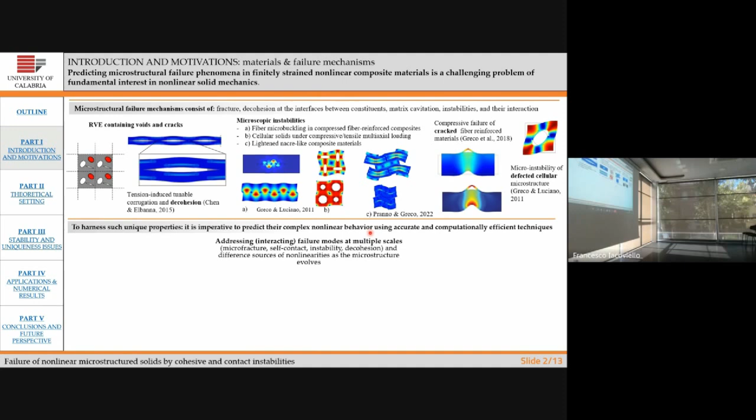Moreover, we know that there are a lot of failure mechanisms such as fracture, decohesion, and instability. So attention must be paid to all of them and to their interaction with each other. As I said, it is fundamental to predict such failure behavior.

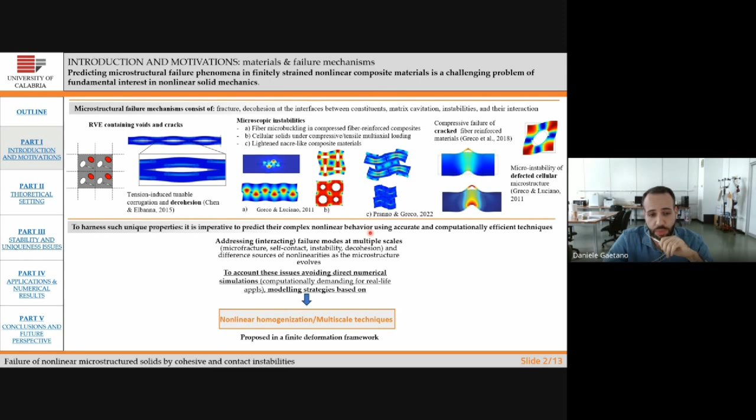In the last decades, in order to address all these failure mechanisms at multiple scales in a computationally efficient way, nonlinear homogenization schemes and multi-scale techniques proposed in a finite deformation framework have been developed. Our work presents an innovative nonlinear homogenization-based theoretical framework for characterizing the failure behavior of periodic reinforced hyperelastic composites induced by reinforcement-matrix decohesion and the interaction between contact mechanisms and microscopic instabilities.

Let's move to the theoretical setting of the microstructural failure problem. We define a representative volume element that occupies a domain, V0, in the undeformed configuration, that contains internal contact and cohesive interfaces. As we can see in the bottom part of this slide, the representative volume element can be made of a single unit cell or an assembly of unit cells in order to capture the microscopic instability phenomenon.

After that, the RVE is driven along a macro-strain loading path by prescribing boundary conditions that depend on the macroscopic deformation gradient, defined by the classical macro-to-micro coupling relations. As we all know, the microscopic deformation field can be split into a linear part and a fluctuation part.

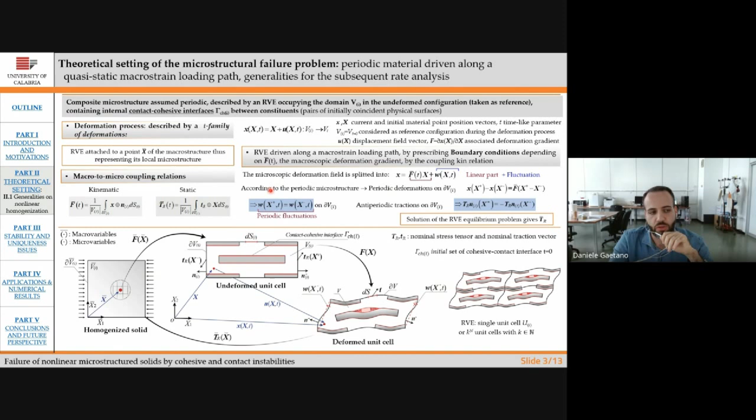So what kind of boundary conditions are we going to impose? We impose boundary conditions of periodic deformation, which implies periodic fluctuation, and we impose antiperiodic tractions on the boundary of the RVE. The solution will give us the macroscopic nominal stress tensor.

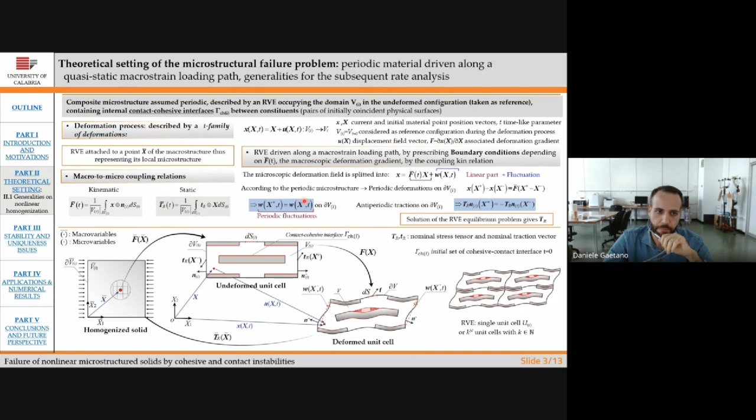As introduced, the representative volume element contains internal contact and cohesive interfaces, so a proper model is needed. Once a cohesive point pair is defined as a pair of material points that are in the same initial position, the displacement jump vector across the cohesive and contact surface can be decomposed into normal and tangential component vectors, with reference to the current unit normal to the lower deformed cohesive surface configuration.

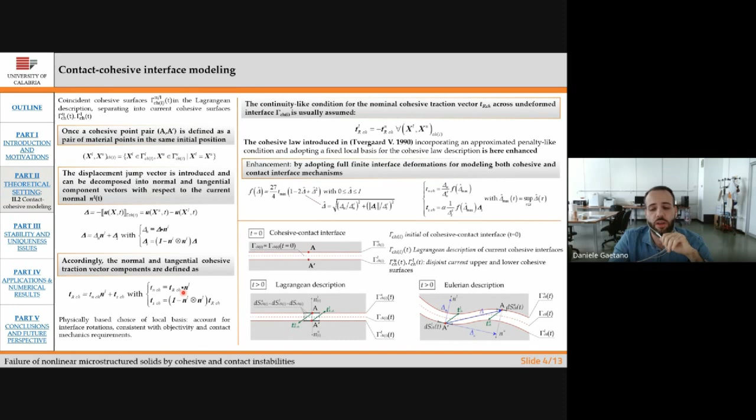The normal and tangential cohesive traction vectors, also referred to the lower surface, are then defined. In this work, we adopted a reversible cohesive traction-separation law first introduced by Tvergaard in 1990, by adopting a full interface formulation for modeling both cohesive and contact interface phenomena.

After the definition of the boundary conditions that we are going to apply on the RVE, and the way we are going to model contact and cohesive interfaces, it's time to go ahead into the RVE equilibrium problem.

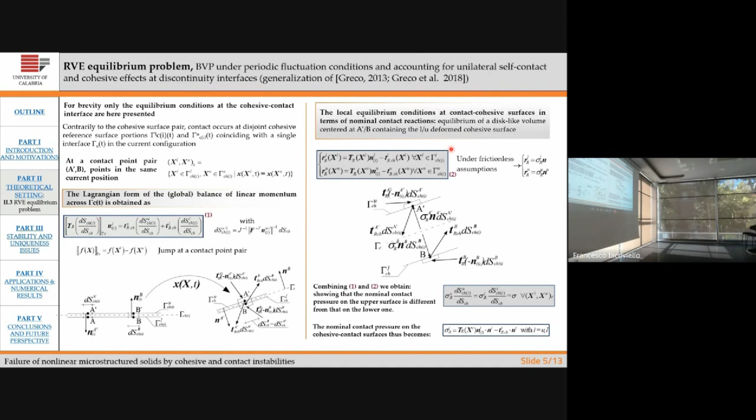At a generic contact pair concerning points at the same current position, we can define two different equilibrium conditions: the global one, represented by equation 1, and the local one, evaluated under the frictionless assumption. The combination of the local and global equilibrium conditions shows that the nominal contact pressure on the upper surface is different from that registered on the lower one.

Moreover, the nominal contact pressure can be obtained, as we can see in this equation, by an algebraic combination of both the normal component of the traction and the normal component of the cohesive traction vectors.

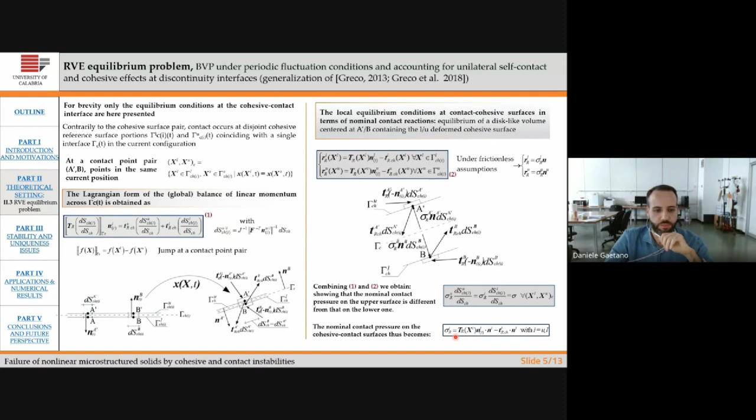Our goal is to study the load-induced instabilities in periodic composite materials that contain internal contact and cohesive interfaces. As I'll show in the next few slides, we're going to solve an incremental problem, so alongside the finite formulation, we need the rate problem.

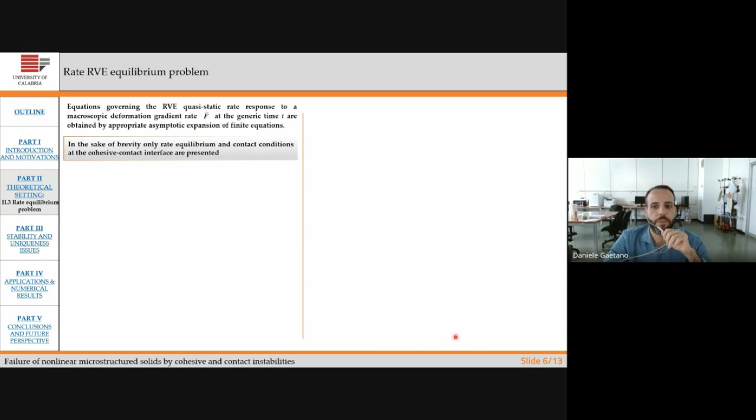At the generic contact pair, we can give the rate contact condition that includes the non-penetration condition. That implies that the nominal contact pressure is only active upon contact, and the additional condition for rating contact means that the nominal contact pressure then vanishes.

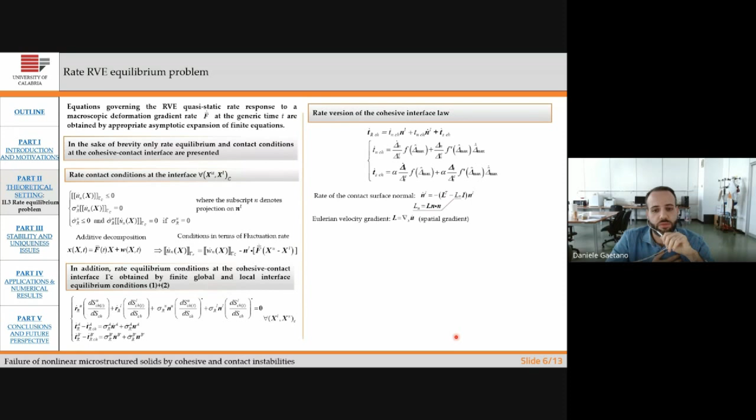At the same time, the rate equilibrium condition of the cohesive contact interface can be obtained by an asymptotic expansion of the global and local equilibrium condition shown in the previous slide. The rate version of the cohesive law is obtained as reported in the slide.

It's important to pay attention to the difference with the infinitesimal theory, because in this case, also when the normal displacement jump and its rate are vanishing, the nominal cohesive rate traction is not necessarily purely tangential, because it has the normal component that must be calculated.

After that, the contact cohesive formulations have been developed. Here we can discuss the stability condition of the equilibrium configuration.

Considering a small perturbation of the current equilibrium configuration for a fixed macro deformation gradient, we can integrate the theorem of power expended identity over the time interval from 0 to the parameter tau, and obtain the work of the perturbation force, highlighted in blue on this slide.

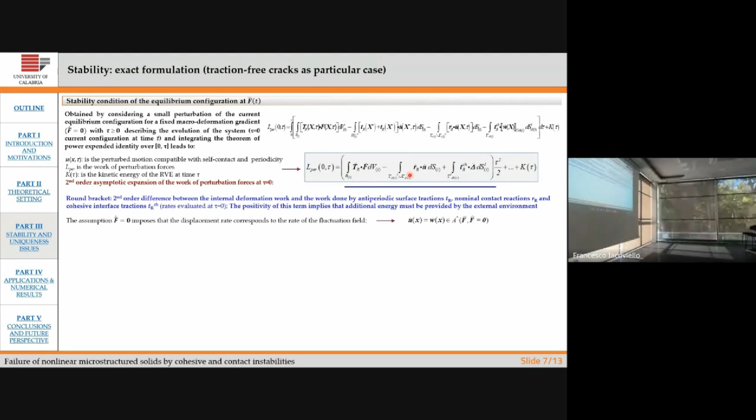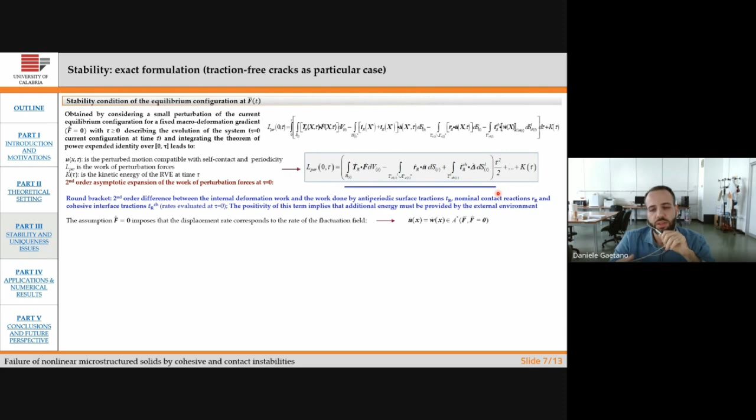We can see that it is the difference between the internal deformation work and the work done by the antiperiodic surface traction, the nominal contact reaction, and the cohesive interface tractions. The positivity of these terms implies that additional energy must be provided by the external environment, and also ensures stability, since the kinetic energy is always positive.

After that, we can define the stability functional over the set of admissible fluctuation rates, and its positivity ensures the stability of the current equilibrium condition. We can see here the stability function and the contact and cohesive contributions.

But the question is, how can we define the primary instability? The primary instability is detected at the critical load parameter, where the minimum eigenvalue associated to the stability function first vanishes.

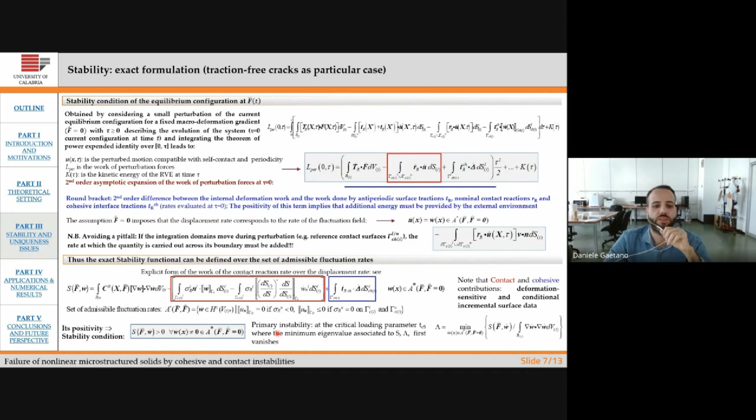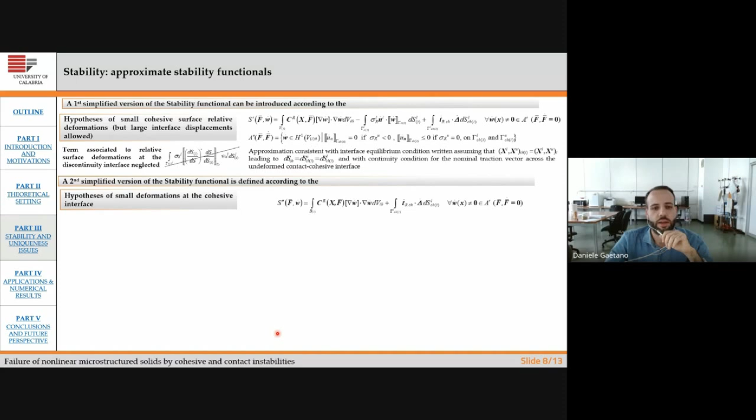After the exact formulation presented in the previous slide, we propose two different simplified versions of the stability function. The first one is obtained by neglecting the term associated to the relative surface deformations, while the second one is obtained by also neglecting the term associated to the surface rotation of the contact cohesive interfaces. These are two simplifications found in the technical literature, for example.

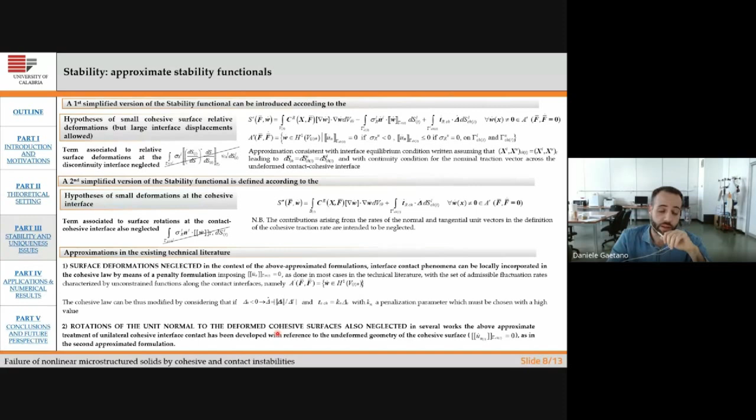Now it's time to go into the numerical results and apply the theoretical dissertation to study the microbuckling phenomena inducing debonding in highly deformable 2D layered composites. The numerical results illustrate how debonding, in conjunction with fiber microbuckling, may influence the critical load of the examined composite solid.

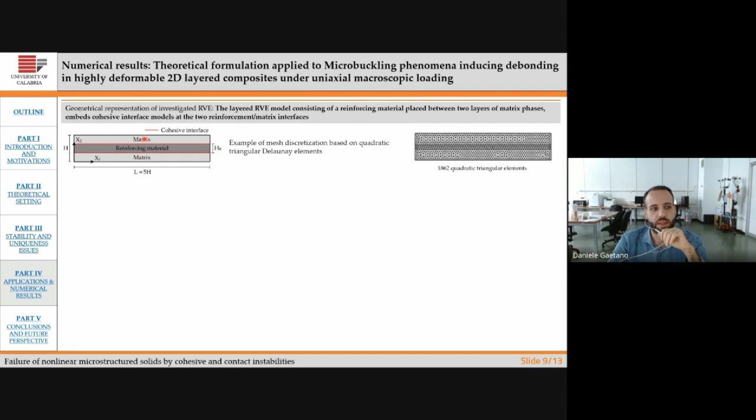The layered RVE that we're going to analyze consists of reinforcing materials and two matrix phases, and we can see the embedded cohesive interfaces highlighted in red.

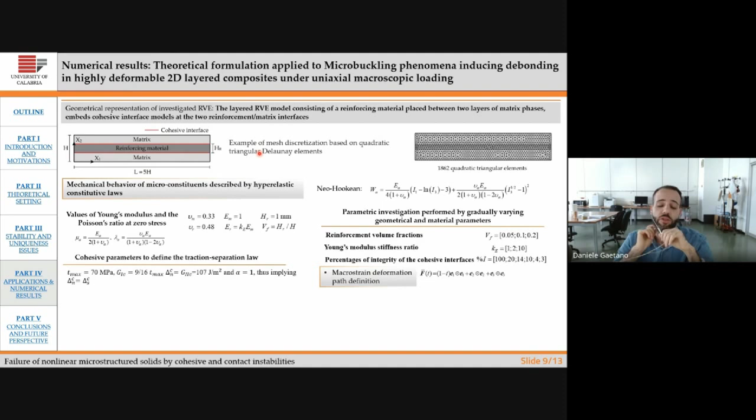The mechanical behavior of the microconstituent is described by a hyperelastic constitutive law; in particular, a Neo-Hookean strain energy density function has been adopted. Here we can also see the parameters in terms of Young's modulus and the cohesive parameters required from the cohesive traction separation law that have been used.

The numerical investigation consists of a parametric analysis varying parameters such as the reinforcement volume fraction, the Young's modulus stiffness ratio that represents the ratio between the Young's modulus of the matrix and of the reinforcement, which we indicate with Ke, and the percentage of integrity of the cohesive interface.

But what does this term mean? When we talk about the percent of integrity of the cohesive interface, it means the displacement jump that is still available for the cohesive traction separation law.

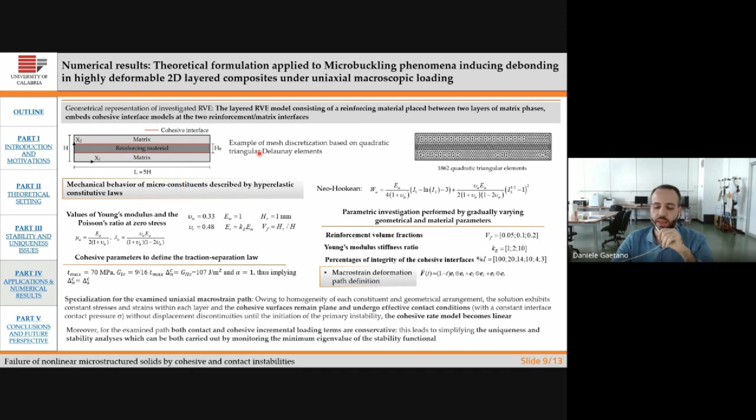After that, the numerical determination of the critical load levels and the associated mode shape has been carried out by means of a one-way coupled parametric finite element model formulated by a total Lagrangian approach. It is made of two different steps, as we can see in the central part of the slide, in the framework of the proposed model.

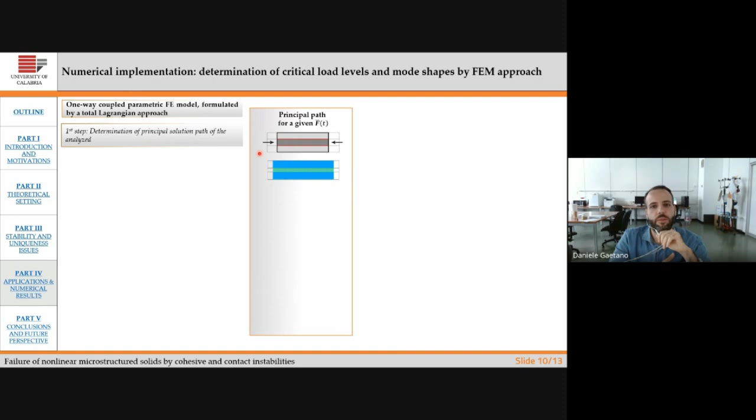The first step is needed to evaluate the principal path step of the unit cell, while the second one performs, in a sequential way, nonlinear eigenmode analysis and an incremental boundary value problem. To this end, a proper code has been developed in the software COMSOL Multiphysics. As I said, here we can see the flow of our proposed approach.

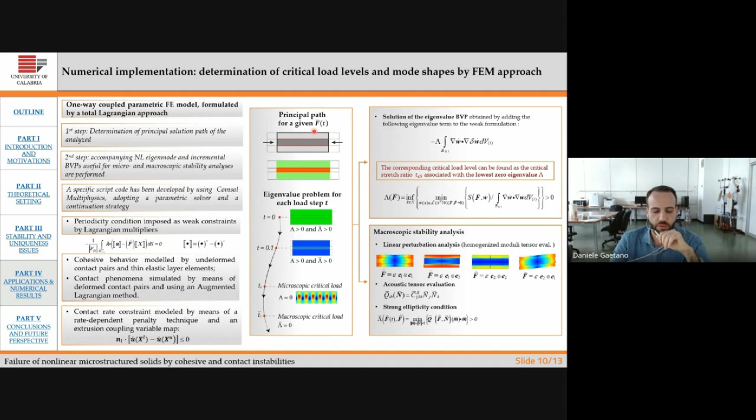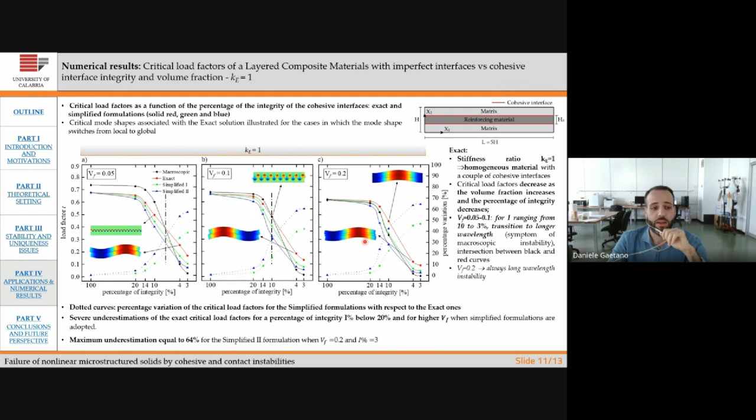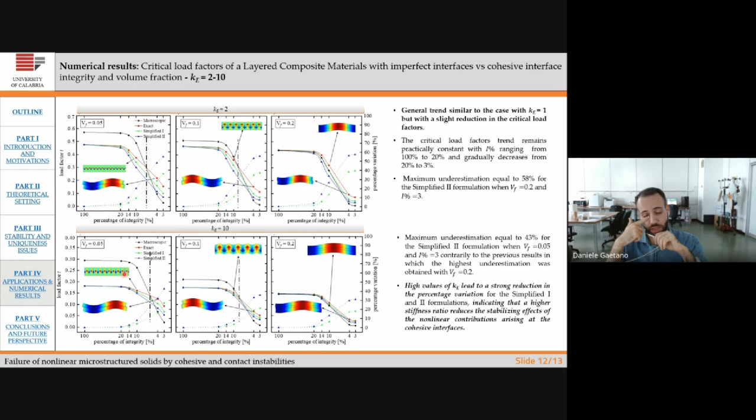So we can conclude that high values of Ke lead to a strong reduction in the percent variation for the simplified formulations, indicating that a higher stiffness ratio reduces the stabilizing effect of the nonlinear contribution introduced, which arises at the cohesive interface.

In conclusion, we proposed a nonlinear homogenization framework to analyze the failure behavior of periodic elastic composites. The aim is to understand the nonlinear effects induced by the reinforcement matrix interaction with contact mechanisms and microscopic instabilities.

So we introduced a stability functional and two simplified formulations for that stability function, and then we applied them to investigate numerical results on 2D layered composites, varying different parameters like the volume fraction, the Young's modulus stiffness ratio, and the percent of integrity of the cohesive interfaces.

As a future perspective, this model can be generalized, for example, in a dynamic context to analyze the influence of interfacial debonding on the incremental wave propagation properties. Thank you for your attention.